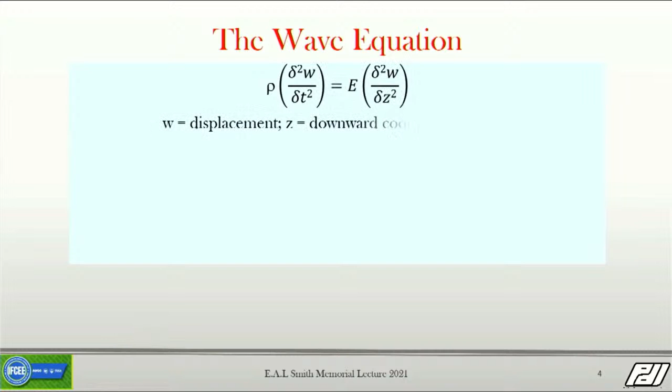One of the things we have to do when we talk about wave equation, even though the PDCA hates it, is we have to talk about the wave equation. I mean, that's what it is all about. There is this partial differential equation. It's a linear one, about the simplest one there is. And of course, for us, it has to be simple and straightforward.

It involves a particle of the pile, W, that moves down the pile at a certain speed. Practically what it expresses is Newton's second law, namely that rho times the second derivative with respect to time, which is acceleration, mass times acceleration, equals force. That's all it is. This elastic modulus is important, together with the mass density. If you take their ratio, you get the wave speed, and that makes it easy to solve that equation.

And that gives us this solution of superposition of waves. With the wave equation according to Smith, it comes out that you have a downward traveling wave and an upward traveling wave of the displacements, the velocities, the accelerations, the forces, and the stresses. They are all in two parts, upward and downward traveling waves.

So you might wonder why I came to this conclusion that Einstein had come to. Let's look at the various quantities here that go in the wave equation: the elastic modulus, the mass density, the wave speed, the area A, the length of pile L. And then if you figure the volume of the pile, that's A times L, multiply it with rho, the mass density, you get the mass of the pile. That's what the contractor usually gets paid for. That means the mass of the pile is equal to ALE over C squared.

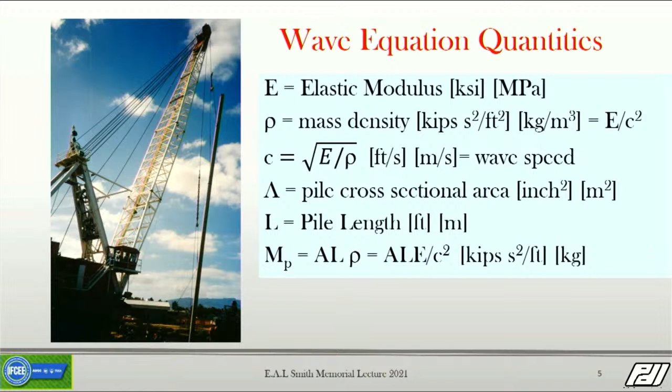So now it dawns on you what Einstein had invented. E.A.L is nothing but energy. That's why the Smith family, mother and father, gave their name E.A.L to son Smith, Edward. So no wonder that Edward, as a mechanical engineer, later in his life made a model using E, A, and L for the spring and for a mass in which he divided the pile.

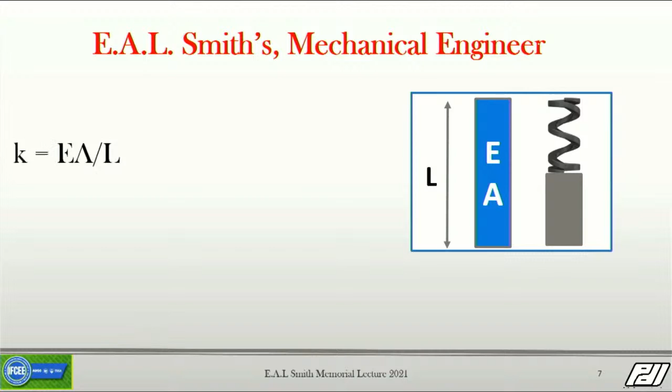So the stiffness, of course, is E.A. over L. That's the spring. And the mass is E.A.L divided by C squared. That's the whole thing. That's our wave equation.

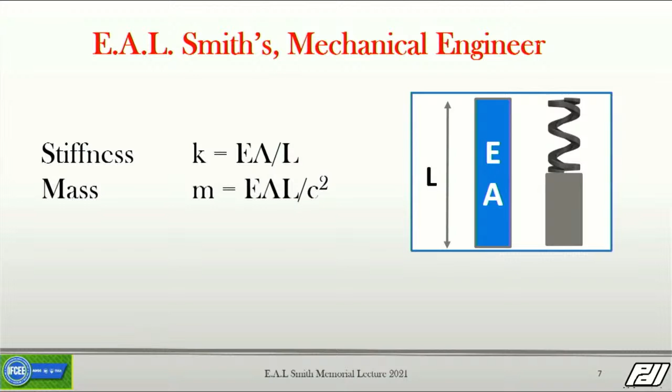And now you know why we need those three letters in his name. There was a big discussion in the committee, I understand, should we really use all three letters? Yes, they are most important.

E.A.L here, that's the final model he came up with, where he realized we have to use a bunch more segments, maybe a meter long or so. And they are all, these segments, masses and springs. And that you can even use for the cushions and the hammer and the helmet. And then we need, of course, something about the soil, unfortunately.

And there, being a mechanical engineer, he thought, oh, well, we need again a spring, and we need a dashpot, like in a car, a kind of damper to represent the dynamic effect of the driven pile.

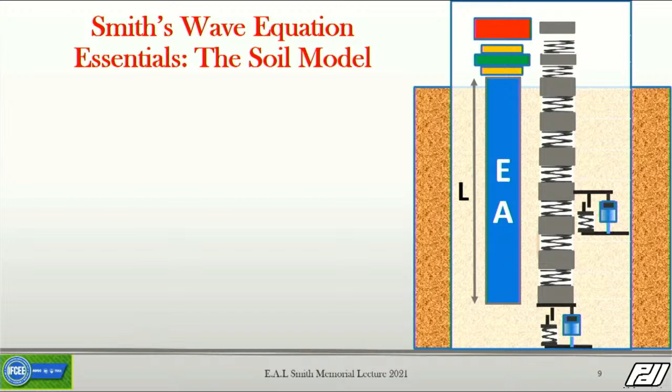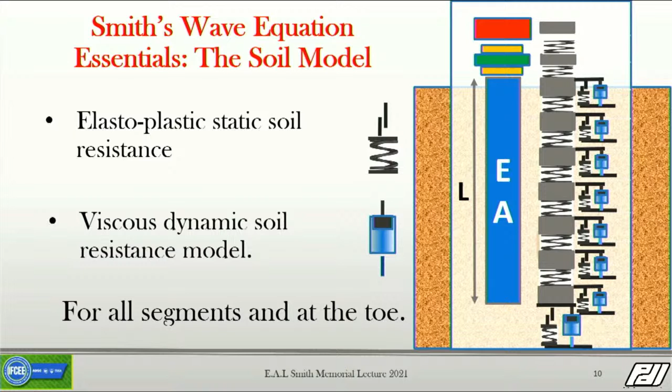Well, then the geotechnical engineers came about and said, sure, that elastoplastic soil resistance is nice, and the viscous dashpot, but we do need it to represent the resistance distribution on all of the segments and at the pile toe. So we got our shaft resistance and our end bearing.

And Smith was not only doing a mechanical model of the pile, he was able to give us some values to calculate with. The one value that we needed was the so-called quake. And a quake is related to what the pile driver observes when he's in the field.

The quake is practically the rebound of the pile. You push the pile down with a hammer, and then it rebounds a bit, and they call it quake. And indeed, we see that spring contracts and then expands, elastically with an amount quake, which is Q.

Then the capacity cannot exceed the value RU, that we have from geotechnical formulas. So that is how it looks then for both shaft on the left and toe on the right.

You have there the elastoplastic increase of the resistance as the displacement of the pile segment goes down. And Smith gave us values of 0.1 inch for the shaft and for the toe.

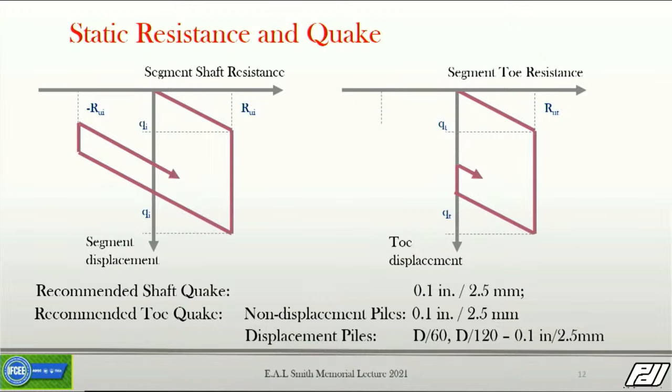And Smith piles were all relatively small. They were the largest diameters were probably 14 or 16 inches usually, and the 0.1 inch is pretty good for that. Now that we went to larger piles, like a 36-inch concrete driven pile, we have to use the diameter as a criterion for that quake value.

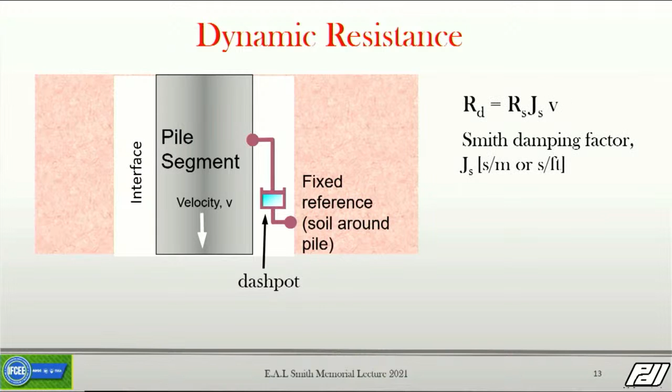And also for the dashpot, he gave us the so-called Smith damping factor, which is 0.05 for the shaft, seconds per foot. And it's a little bit of an awkward model that he uses. One has to multiply the damping factor, which is in seconds per foot, with a resistance to come up with the actual damping factor.

So it's not truly linear, but for those purists who want it truly linear, we also provide now the model with an RU instead of an RS, and so then it's a truly viscous damping. But no matter what we do, we always go back to Smith's model. It is really the one that works most reliably under all kinds of circumstances. Not very sophisticated, but reliable.

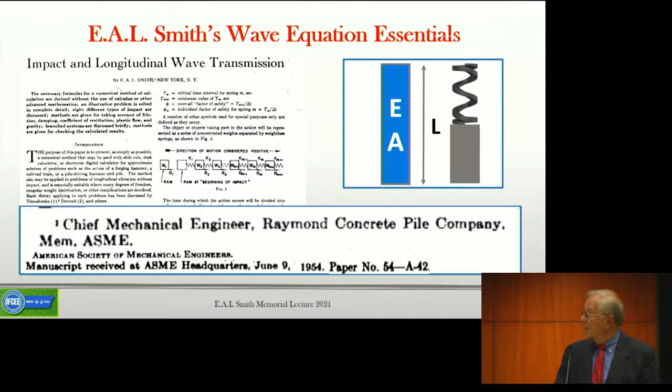And of course, there are possibilities of having some errors still. Anyhow, he wrote about it in a 1954 paper, and then later, or actually earlier, he wrote a paper after a seminar at IBM, and the seminar was in 1950. And in the seminar, they discussed how this wave equation was to be programmed.

And I have heard through George Goble that this was actually the first engineering non-military program that has been written for an electronic computer. So he was way ahead of everybody else there in the civil engineering community. And he later then, of course, published that also in Geotechnical Engineering Journal. And that 1960 paper is the one that's frequently quoted today still.

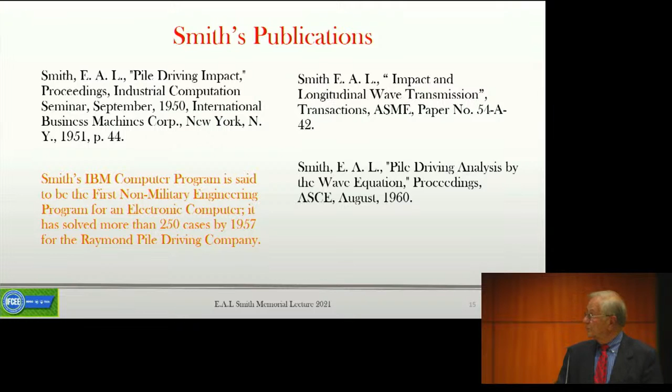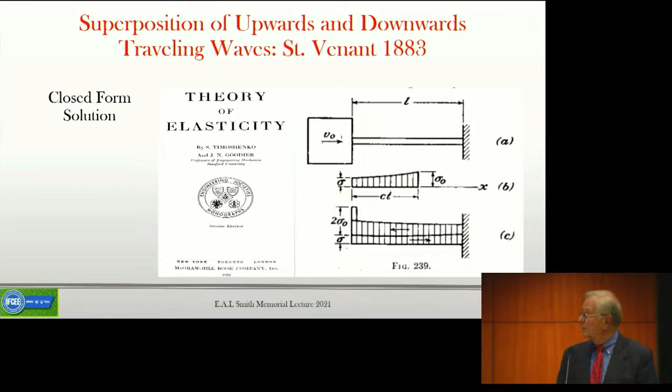Well, in the earlier times, the solutions had been done with the superimposition of waves, like Saint-Venant solving here the pile stresses under a rigid mass. And that was then written up in theory of elasticity by Timoshenko, and it was really my Bible when I worked on the interpretation of data.

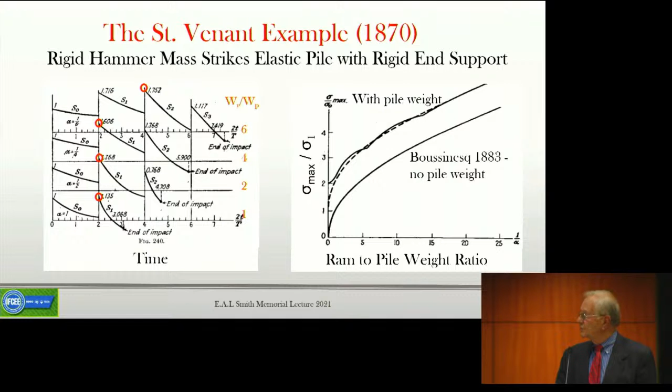Boussinesq, for example, used it also earlier in 1883 to come up with something that related the mass of RAM to pile weight ratio, and that formula was later still used frequently as a rule of thumb for how big your RAM has to be when you're driving a pile. But that was not considering yet the tension stresses that could develop in concrete pile.

It couldn't be done by many people. And so, one thing that came out of it, though, that's useful for us is this graph of time and length, which is very instructive on how the waves travel down the pile and return.

And we used that then, and I used it in my thesis in 1970 to interpret the data, like on the right-hand side, you see the force and velocity data that we collected, and then out of that came the upward wave and the downward wave.

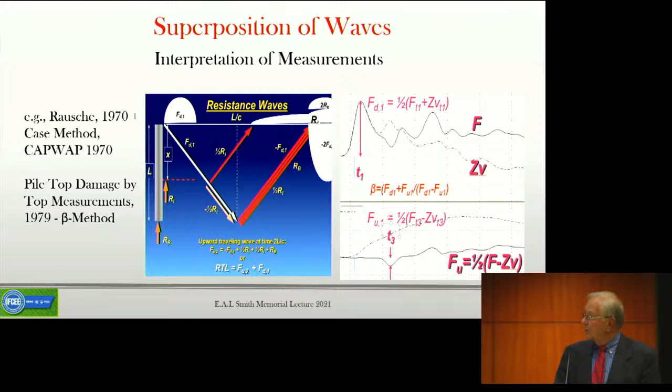And that leads then to the development of the case method, and then also later for the signal matching with this method of characteristics, as it is being called, where instead of EA/L, you are now using EA/C, the impedance of the pile. And so you use pieces of EA/C, and other people, particularly in Europe, are using that solution for their wave equation analysis. But we use it for both the case method and the CAPWAP method now, after initially using also for CAPWAP the Smith solution. And so you see on the right-hand side, in the upper right-hand corner, for example, a matched wave-up curve.

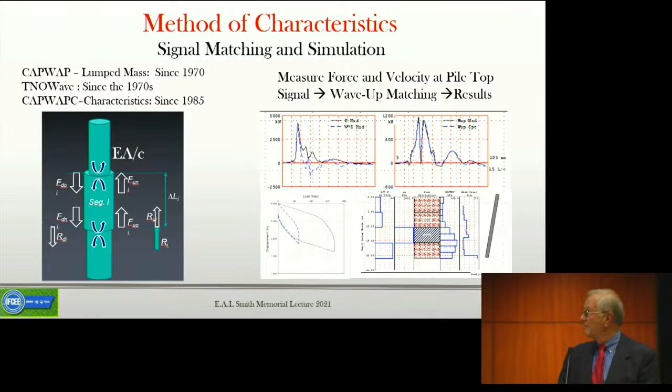Being in Texas, I should mention all of the work that has gotten into the Smith solution at Texas A&M by Samson, Hirsch, Lowery, and others that did a thorough work on checking the method and the parameters that go into it, and that really helped to get the attention, let's say, of the highway departments, the Texas Transportation Institute, and the Federal Highway Administration on the power of this solution. And they did also plenty of capacity correlations.

Coyle and Gibson did some interesting work on trying to get the damping factors by impact loading triaxial models, and then getting the ratio of the dynamic to static resistance versus velocity of loading. And so that then was picked up by quite a few different researchers who thought, now we have a better damping model. But after all the efforts and the years that went into it, we all went back to this old Smith model because it's just so much more practical and easier to use.

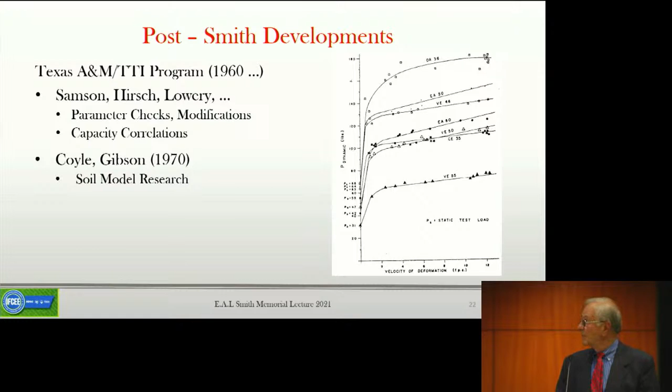One thing that Smith had not done, and that hadn't been done yet at the Texas A&M program, was doing something for the diesel hammer, which is quite a different animal. And so in a dissertation that came out in 1975, Dave Rempe, who worked as a graduate student for Tom Davisson at the time, came up with his Diesel 1 program.

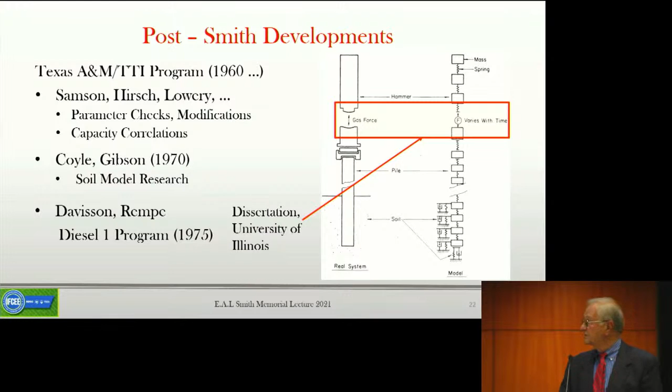And so then in 1974, the Federal Highway Administration did kind of a competition between TTI and GRL, at that time Goble Associates still. And they said, well, write us a program now that includes the diesel hammer and also compare it with field measured records. And in that regard, we were kind of ahead. We had a lot of records already taken under impact hammers on pile tops, and they consisted of force and velocity, and we were able to machine process them.

So both institutions were actually awarded this contract, and both programs were developed. We called ours WEAP. And so in 1976 already, we were able to present a program along with the necessary documentation, and we gave seminars already. I should mention the help that we got from the FHWA and also the New York DOT. For example, Paul Bailey was a great help in checking the program.

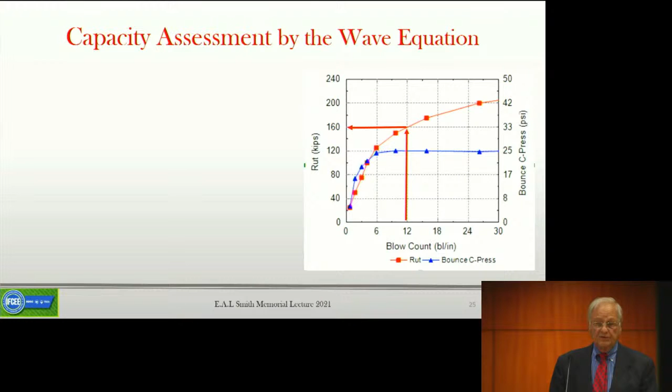Well, let me give you a few little stories here. First of all, about the capacity assessment. That's, of course, one of the things that wave equation was supposed to do. It's supposed to give us a better formula, and it does. The formula, the dynamic formula or energy formula, as it was called, is very simplified.

But if you create with the wave equation analysis a bearing graph which relates the capacity to the blow count, then you can go in with your known blow count from pile driving and read the capacity of the pile. Now you will have to apply a certain factor of safety to it, which has been 2.75. Right now we would use an AASHTO resistance factor of 0.5 and then use that capacity with 0.5, and it has to be greater than the factored loads in the new LRFD method of the AASHTO specifications.

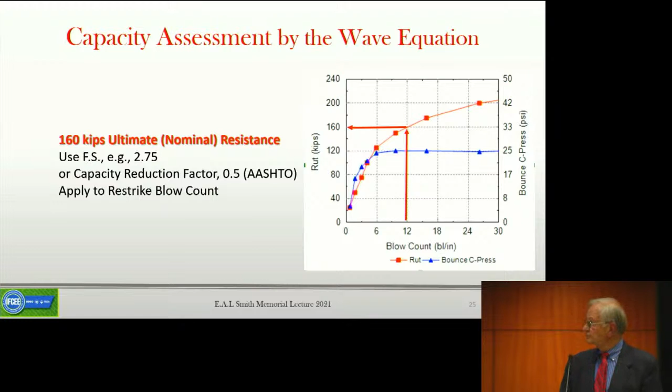Well, in 1972, we then had this memorable demonstration.

Purdue University had organized a specialty conference on foundations, and George Goble suggested we do a demonstration at that time in Lafayette, Indiana. People were invited to a field demonstration of pile driving, an H-pile that had been given by ASCE as a gift.

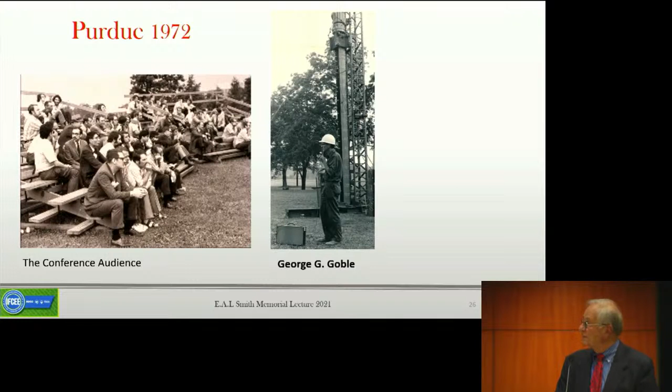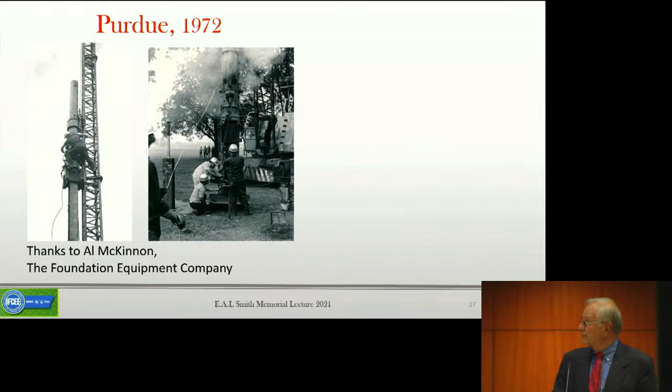George Goble then organized the rest - for example, he had sacrificed some Purdue graduate students to do this, what we call a load-set diagram on the pile while pile driving is going on. So they pass a pencil along a piece of paper while the pile moves.

And then we connected our instruments along the pile.

And then came Professor Leonards and said, well, hey, can't you get the residual stresses too? And we thought, oh my God, now residual stresses, this is tough to measure - you need very precise measurements. Well, we hoped we could do that. So we worried about that.

Anyhow, the demonstration started with all our wires connected and our first pile driving analyzer connected to that thing.

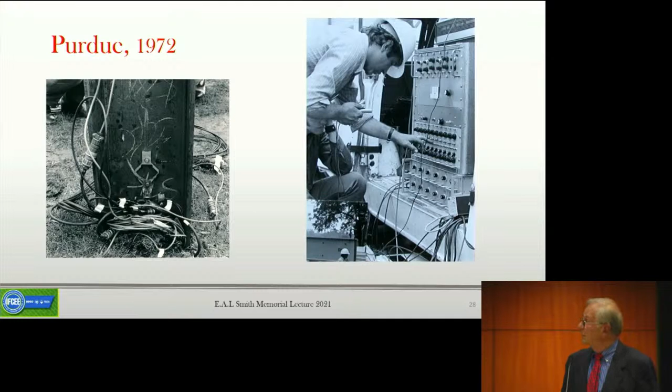George Goble was reading that thing, and of course a downpour started - reminded me of the Dallas downpour yesterday. We had everything set up outside, and we had to push the tape recorder under the car and out of the rain, and had a little bit of noise in the lines because there was water getting in there.

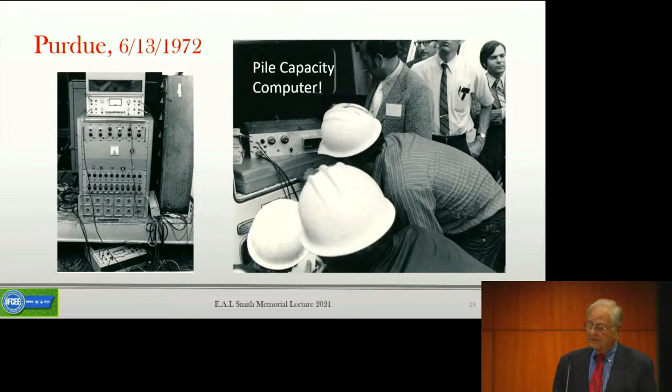And so he came up and looked at this little output from the pile driving analyzer, which was still called pile capacity computer, and read a number - once 145, a little bit later 175, and that was in kips. So the pile driving was done, and the rain was over right at that time.

And then a static load test was set up for the next day. Here I might mention Hal Hunt, some of you may still know, one of the organizers of DFI, who had interviewed me at the time. He wrote a newsletter for DFI, and was before that at Engineering News.

All right, so then we did this load test also. Everything has been written up by Goble, Kovacs, and Rausche. William Kovacs was a graduate student - no, he was assistant professor at the time at Purdue. Later he had quite a few battles with George Goble when he was at the Bureau of Reclamation about how to properly measure the energy in an SPT rod. So they were working together later for a long time. He was going pretty high up, I believe, in the Bureau of Reclamation later.

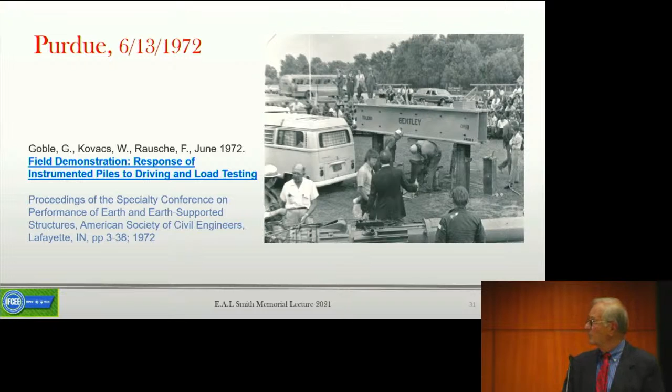And then Dave Rempe looked in his chart that he made, his bearing graph with his Diesel 1 program. For the 40 blows per foot at the end of driving, he came up in his chart at 166 kips. Had he used the old Smith program, it would have been 180 or something, or 175 or so.

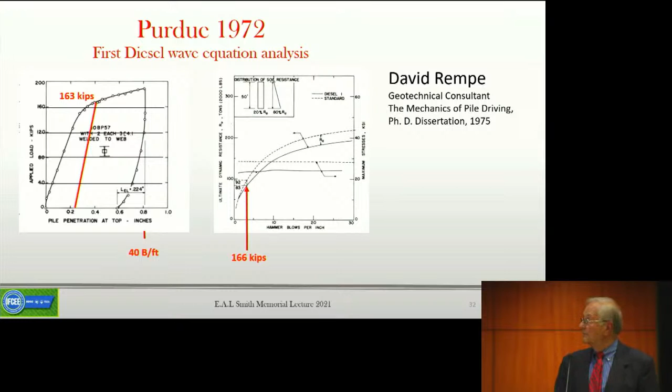Anyhow, the load test then, the day later, showed 163 kips, so that was quite successful and amazing. Now, of course, this capacity is the Davisson capacity, and we know that capacity is something undefined - there are various definitions for it, so it's also a little bit of luck, of course.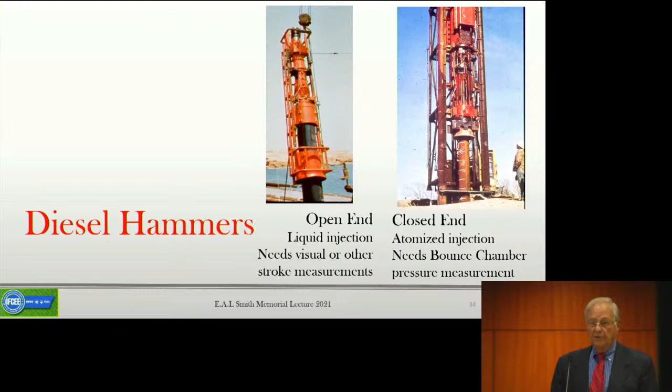Well, diesel hammers have become more and more important, and those are animals - not just machines. They do what they want. You put some diesel in, and they might jump this high or that high. For the closed-end hammers on the right-hand side, you have to have a so-called bounce chamber pressure gauge on them to know what the jump height is inside of this hidden thing. On the open-end diesel hammer on the left side, you have to kind of see - is the ram coming out? And it's good. If it's not coming out, then you don't have much resistance, probably. Well, you have to study that accurately.

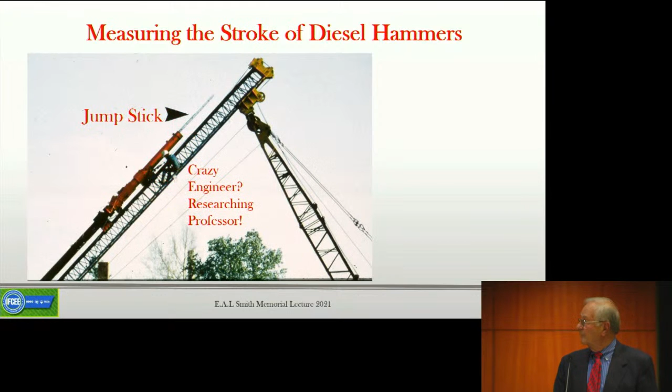And there is Professor Goble sitting up on the 45-degree one-to-one leads. Thanks to McKinnon, he got a little stick mounted to the lead so he could comfortably sit right next to that hammer while it was exploding and see on the jump stick up there how much the stroke was, so that he could talk into his tape recorder.

That crazy engineering feat produced data that we could use later in the so-called saximeter formula, which we now use in that little instrument that times between hammer blows and converts that to stroke for open-end diesel hammers. It also helped us in our check of the wave equation analysis.

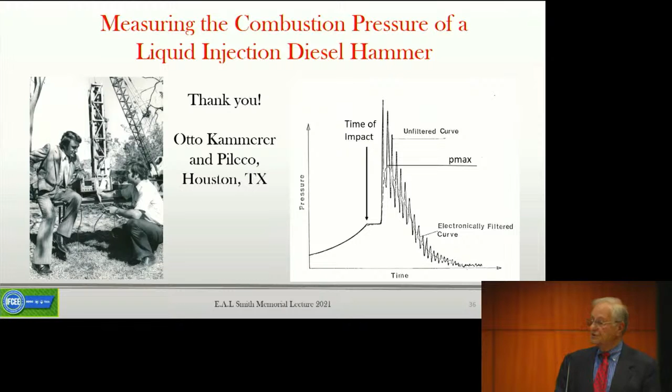Another gentleman who supported us a lot was Otto Kammerer of Pileco, here in Texas. He did a lot of tests for us on his test grounds, and he didn't care much about the neighbors around him, even though this test area was within a zone where people tried to live peacefully. We measured pressure there on these hammers, and we did that on a few other occasions on other hammers, which was very helpful.

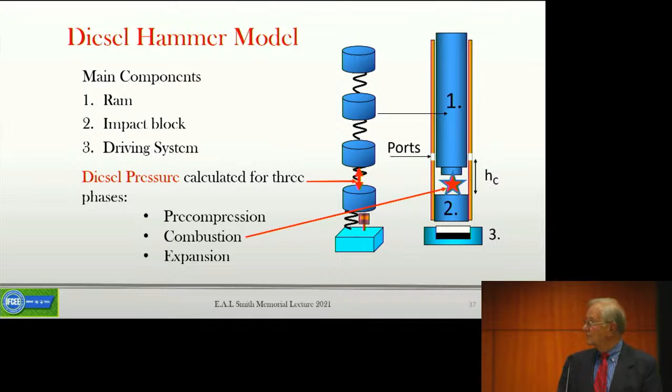That was helpful in our development of the diesel hammer model, which consists practically of a Smith E.A.L. model of the ram and the so-called anvil or impact block inside, plus the driving system underneath. The pressure that develops in the hammer is then modeled with three different phases: precompression, combustion, and expansion.

We need these measurements to help us come up with the pressures that we have computed, and then a potential correlation with actual measurements on the pile top, like you see on top, the forces that we had measured on a diesel hammer.

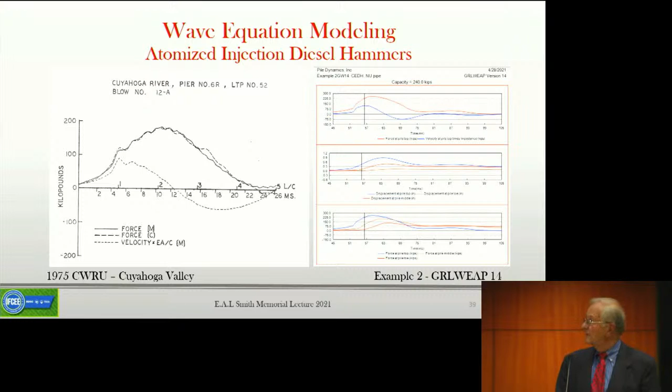As you can see for a closed-end hammer here, we also had a pretty good agreement. On the right-hand side, the plots from our newest GRLWEAP program show quite nicely the forces as they were on this 1975 job in Cleveland, recorded on the Link Belt 520 hammer.

Capacity is not everything. One of the important things E.A.L. Smith had to do for Raymond was determine the stresses in the mandrels, because apparently the mandrels used to break, particularly at points that were pinned together. These things were typically 8 feet long and were very heavy pipes, and these pipes had to be held together with a pin, and there was some slack.

Already at that time, Smith modeled and coined this term 'slack in the pile.' So it's really a pile that allows for some tension between segments.

Now I'd like to show you a little timber pile example where we had some soil boring, probably SPT, and a Vulcan #1 hammer, in Louisiana. It was pretty recent, actually—for me, recent—about 5 years ago.

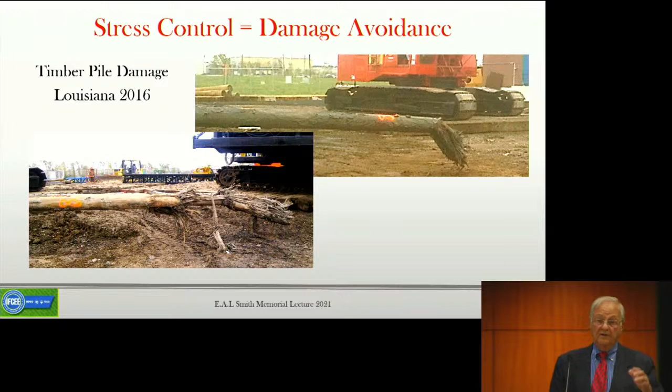On the construction side, we had a bit of a stress problem. These piles were 60 feet long and only had a 7-inch diameter tip, and they went into dense sand. The driving criterion was that you had to get the pile down, but it shouldn't take more than 30 blows per foot. So I checked it with a wave equation analysis.

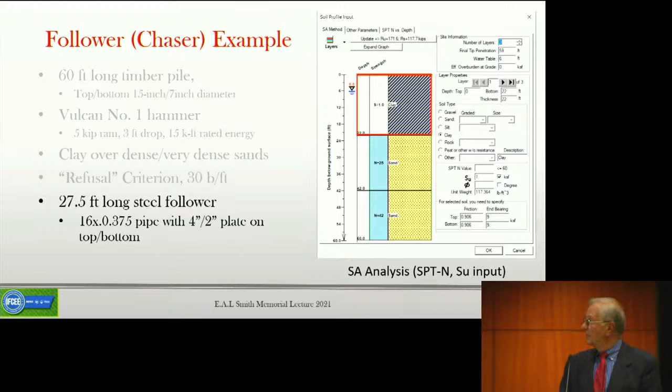This was an interesting project, not only because the pile was subjected to high stresses as a non-uniform pile, but also because they put a follower on top later, since it had to wind up about 10 feet or so below ground, and then a pump station was built on top of it later. So this is the follower on the right-hand side—a steel follower on a timber pile—so it becomes a pretty involved model that we had to use.

It's always a question what the follower does to the pile, whether we get energy losses, and what the stresses are in the pile underneath. We are able to analyze that pretty rationally with slack again between pile and soil, and pile and follower. And of course, the follower also goes into the soil a piece that we have to consider.

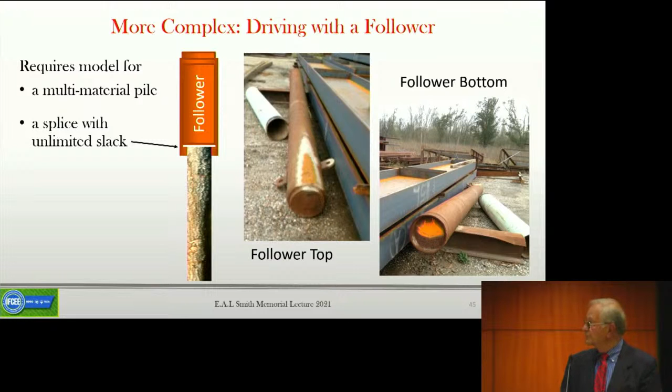We use the model of Smith, and I must say this is something where the Smith E.A.L. model is really superior to other models like the characteristic solution, because it allows us to make a really realistic assessment of a somewhat nonlinear event.

The results here—I don't know if you can see these numbers well—but they show, in that red box, the forces and stresses. The compression stresses, in the second column from the right, go from 15 to 16 KSI in the steel down to 1.6 KSI in the wood. But on the other hand, the energy decreases gradually—there is not much energy loss in that slack.

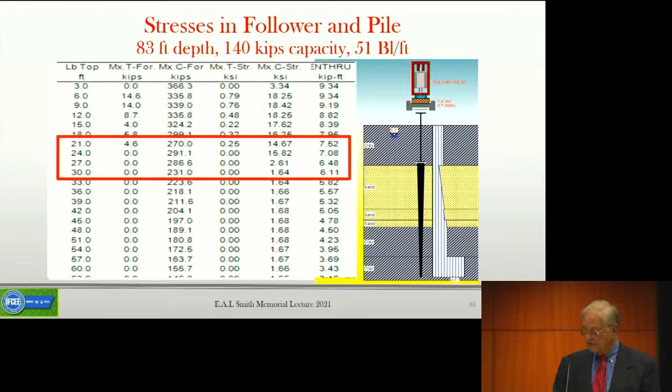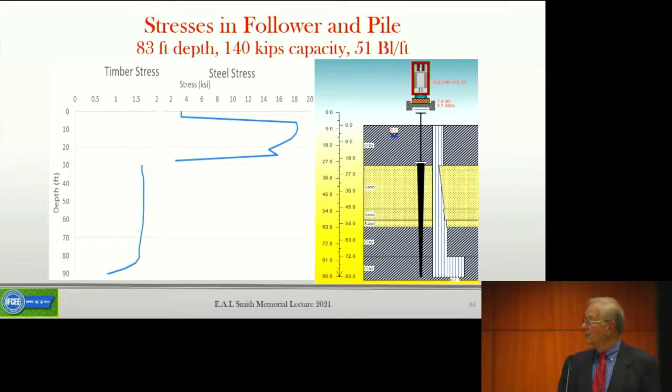So you can see there quite a bit. This plot here shows you the stresses in steel on the right top, and timber on the left.

Well, residual stresses is something that has become more and more important. As I mentioned, Professor Leonards already pointed that out in 1972, that we should do something about that. For long, slender piles, it's important.

So, well, Holloway already in 1978 had done a thesis using the Smith TTI program, introducing the residual stress analysis.

Residual stresses develop in a pile because when you drive the pile down, you push it down under a hammer blow. It tends to rebound a bit, but the negative resistance forces along the shaft that develop then hold that pile down, keep it in compression, so when the next blow comes, the pile is already compressed and doesn't have to be compressed any further, and then moves relatively easier into the ground. So that makes actually the pile driving a bit easier, and makes the pile stresses a little bit higher.

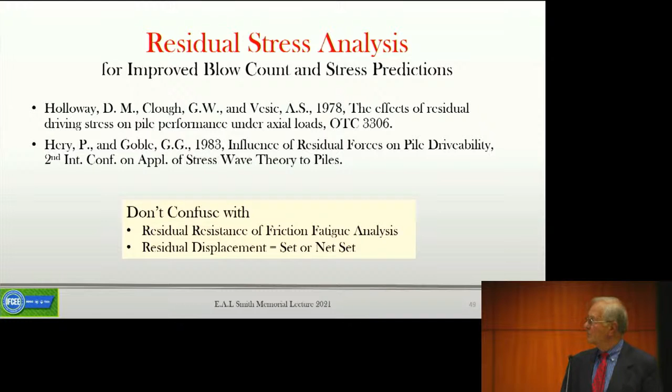Well, in any event, for the Becker rod, for example, for the Becker penetration test, residual stresses are actually something important. The Becker test is designed for very dense soils where the SPT rod cannot penetrate. And so the Becker test is used primarily to evaluate the soils of dams for liquefaction.

It is a 6.63 inch diameter, heavy walled pipe, closed-ended, driven with a closed-end diesel hammer, an ICE 180, which drives about 90 blows per minute, and is so a very convenient system to obtain a blow count, which is called N30, because it's normalized to 30% of the rated energy of that hammer. Like the N60 for the SPT was normalized to 60% of the SPT hammer.

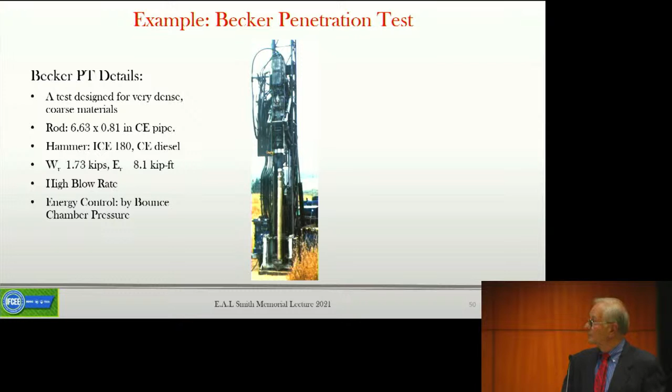So they drive this thing down, and lately more and more measurements are made, now also at the tip. And because it's really important for evaluating the blow count and the liquefaction potential from the blow count, how much force or energy gets to the pile toe.

So with these measurements now being done on top and toe, you have to be sure you interpret them correctly. And here is the resistance distribution from our wave equation analysis again, showing also the end bearing, something more than 40 kips here actually, as evaluated first with a red line by the measurements and with a black line by the RSA analysis. And that's something that, of course, Bengt Fellenius had been warning us against, not to misinterpret our measured data because of the residual stress effect.

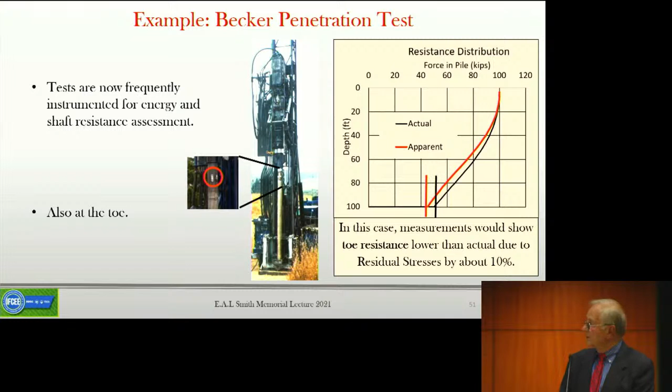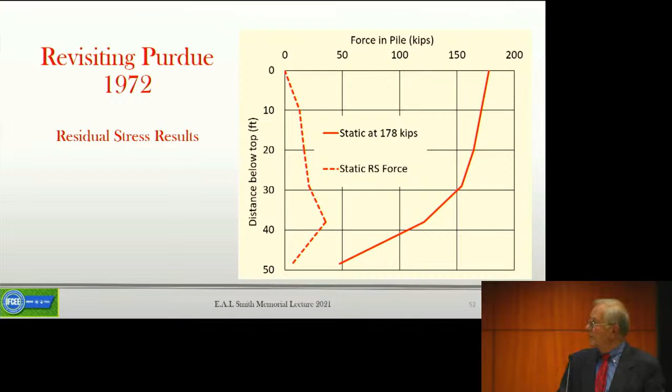CAPWAP shows something similar. One of the differences at the very toe of an H pile is that we're not too sure over which distance the plug actually has its effect getting into the steel itself, and we measure force at the steel. So there's always a little bit of uncertainty how much force we really have at the very toe of that little bitty steel edge.

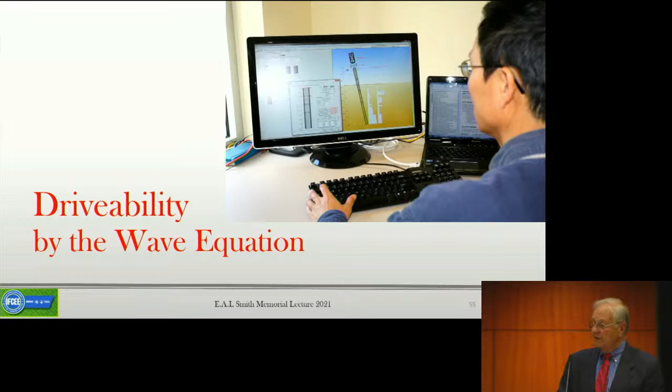Okay, I have to mention the drivability analysis, and here's Dr. Lee Quinn, who tirelessly is programming our program to expand on the drivability analysis, which means that in addition to the bearing graph and the so-called inspector's chart, we now have a third analysis type in the program, which is the drivability, and it has become very popular. Everybody around the world wants to do a drivability analysis.

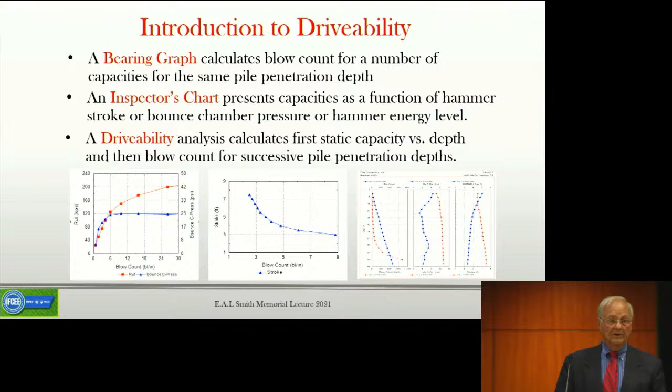They're not so much interested in the bearing graph anymore. They want to know how many blows will it take to get the pile in, how long does it take to get the pile into the ground. So what it takes is that we do an accurate static analysis of the soil. In a way, we're kind of doing the opposite of what was done at Smith's time, where he said we don't know what the soil does, and static analyses are unreliable. So now we're saying we can use those static analyses to get us a long-term resistance, and from that we estimate a so-called static resistance to driving, the SRD.

So we reduce that long-term resistance from the formula, and then we get a resistance that we can subject our Smith wave equation to and get our blow count. Now the SRD is calculated typically with a setup factor, which pile drivers know. When they do a restrike, they have more resistance than at driving. The ratio is the setup factor in very global terms.

So we need something that tells us what the soil is doing. We can use the much maligned SPT test that everybody says is not very accurate. We can use what everybody praises, the CPT. We can, of course, in Texas, use the Texas penetrometer, the heavy one. And then we can use grain size analyses, friction angle, and undrained shear strength, and then, of course, the soil weight gamma. And we need the water table also and the soil type to be able to do something.

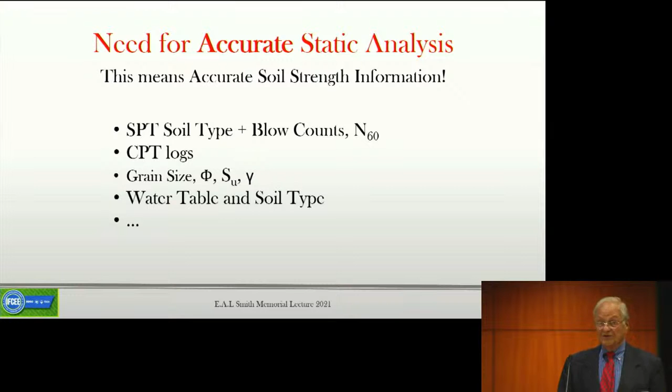Here comes the SPT, always helps us with the soil type. For the CPT, we have to kind of guesstimate what the soil type is. So we can do that again with our Purdue example. We had an SPT. We can divide the soil into these layers that you see on the right-hand side from the SPT. And then we see that our static analysis, our SA analysis, gives us 177 kips. So not bad - we had 166, 163, 177. That's all pretty close, and that is a long-term capacity.

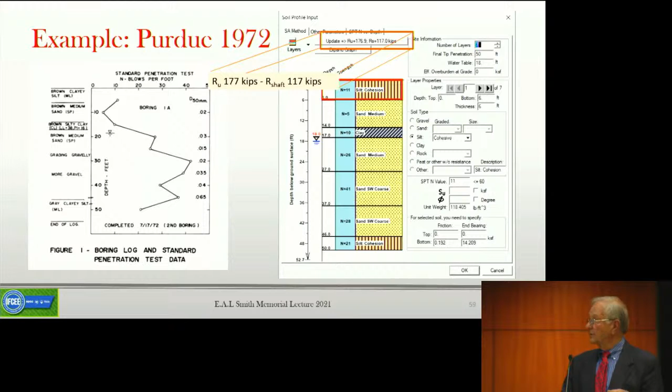Actually, in the sand, it's not very substantial - there is some loss of resistance during driving. We use 83% typically during driving. So then we can do our calculation of unit shaft resistance, unit end bearing, quakes, and damping, all versus depth, like in this table, and come up with, on the left-hand side, capacity versus depth and blow count versus depth. And if we look at this together now - blow count and driving log, the driving log is in blue, the blow count from our wave equation in red - you see they agree quite well, so not too bad.

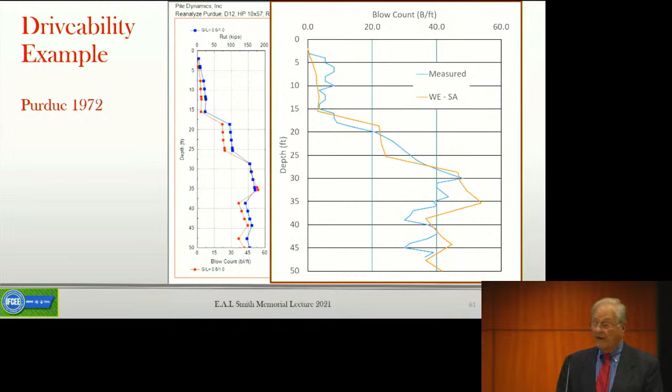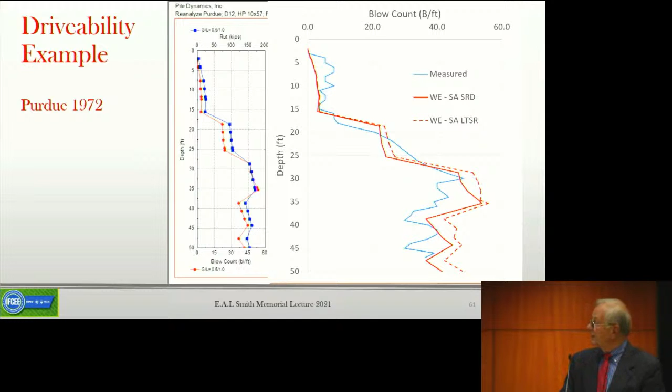And that with a stupid SPT test. But of course, these were relatively simple circumstances. Had we used the full resistance, the long-term resistance, you would get the dotted line - you would get a little bit higher blow counts towards the end.

Now, there are plenty of error sources, and I don't want to go into them all. Of course, one is hammer performance, all of these quake and damping factors, and the resistance versus steps in the SRD calculation method.

If we look at all those methods that we have now in the program that use SPT or lab constants, and plot the long-term resistance - those are the solid lines on the left-hand side - then you see that they can give us quite different results for capacity versus depth. The black line is what FHWA used in their driven program, and it's really using the Nordlund and the Tomlinson method. The lowest value was the SA method that we usually use, our SPT-based SA method. And in between, not too far above that, we have the API methods from the American Petroleum Institute.

The newer one and the older one are almost the same for non-CPT - why do I say CPT? CPT methods, cone penetration test methods, non-CPT. So they are relatively close together with the Bowles method, which is the one where we only give it like medium sand or stiff clay.

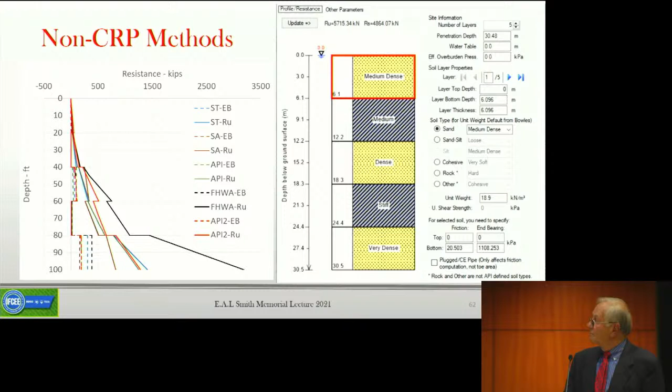Another method came up, particularly fashionable in Europe now, called the friction fatigue method. It had actually been introduced already in 1977 by Heerema for offshore work. It says that you can wear down a soil, reduce the soil by fatigue. So those elements subjected to a lot of pile driving fatigue more than those down below that just experienced a few hammer blows.

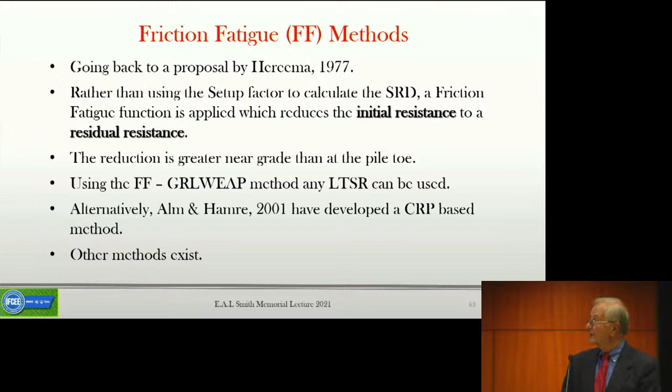So between those highly reduced elements and those further down, we have kind of an exponential decay of loss of resistance. That's in very short terms what they proposed, and Alm & Hamre in 2001 put that in a very concise form with all the necessary equations, so many people want to use that now. So we had to use it also.

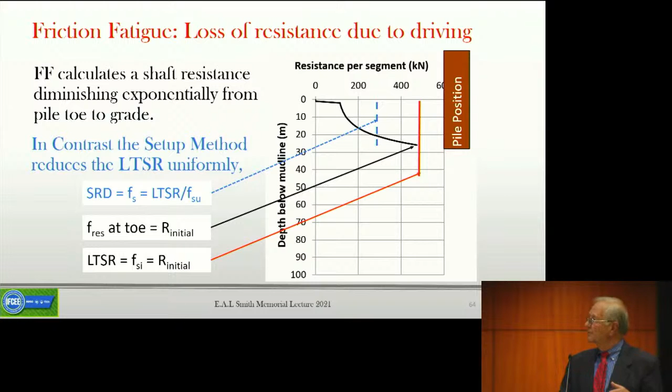Here's a demonstration of this exponential decay of the resistance in a friction fatigue analysis. There's a blue line in there, a dotted vertical line, showing the SRD calculation from our setup factor, which is done uniformly over a soil layer. In contrast, the friction fatigue method does this exponential decay.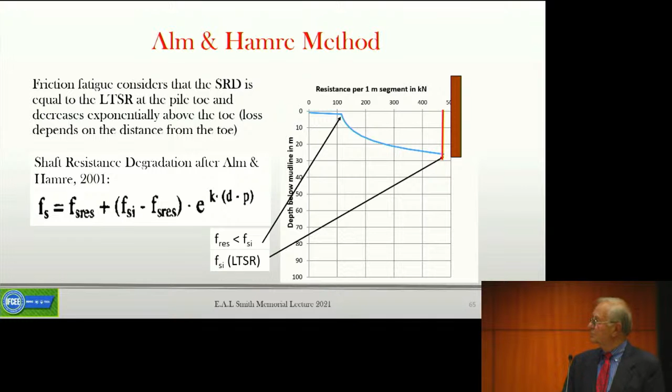Alm & Hamre gave these equations for that E function, and they also gave very specific formulas based on the CPT test that are practically a beta method for sands. And there is, of course, our cone resistance QT in that equation.

What is interesting is if they use a very high resistance at the shaft, the initial resistance as they call it, based on the cone penetration test, then they use a reduction factor of 5 for the sand. We use only 1.2 for our standard setup method. So they use a very high initial resistance, but then reduce it very sharply by a factor of 5, near the grade, some distance above the pile toe.

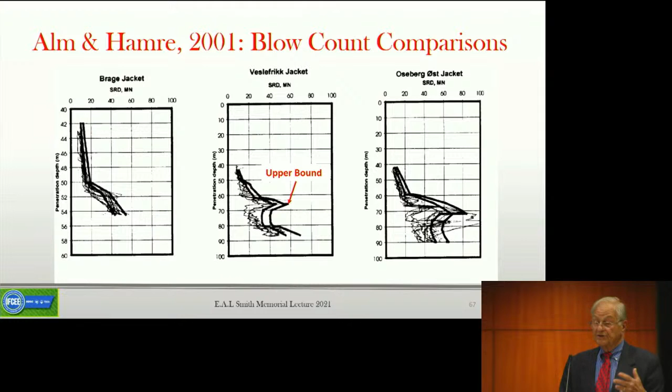They did a lot of correlations, and they also suggested using an upper bound to be safe, 25% higher than the normal analysis.

If we do that for our Purdue example again, we come up with this black line now, which is a little bit lower towards the end of driving, and that's what friction fatigue is all about.

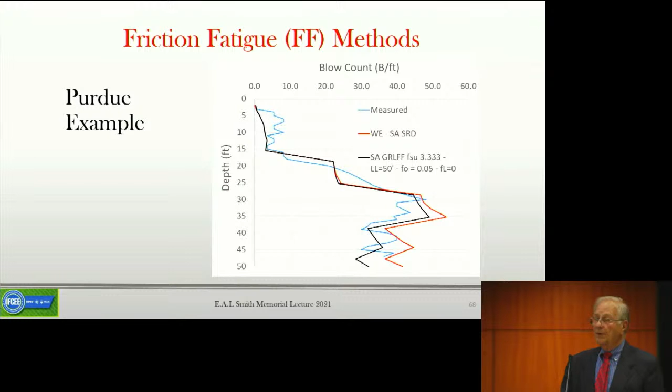When you drive the pile deeper and deeper, you may not gain all that blow count anymore. We've observed that frequently in the Northwest, for example, that you drive a pile and it doesn't change the blow count - it keeps a constant blow count throughout driving. So that might be one way of improving the prediction of very long piles into very dense sands, as it seems.

Okay, let me quickly show now also - I've shown you the non-CPT methods, I want to show you a few CPT methods. I digitized myself by hand with a red line this electronically recorded QT and FS, cone penetration resistance and friction sleeve resistance. I wanted to compare what comes up as a result of that.

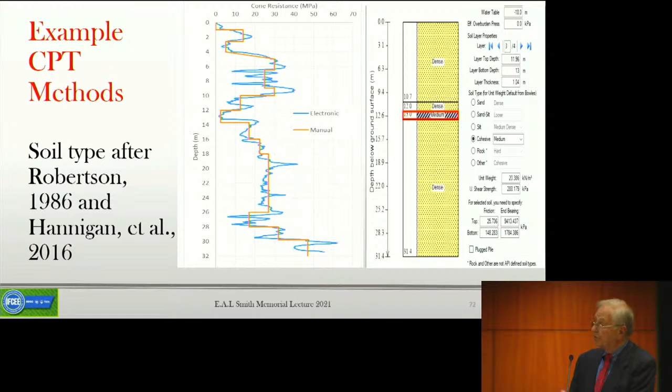That jumped again, but it doesn't go back. Then we have to assign a soil type, which we do via Robertson - that was that previous slide. It jumps around according to this chart, and then we get the soil types that way automatically, or you can do it by hand. So then I did the Schmertmann analysis, and you see that my hand digitizing and the electronic one are pretty much the same.

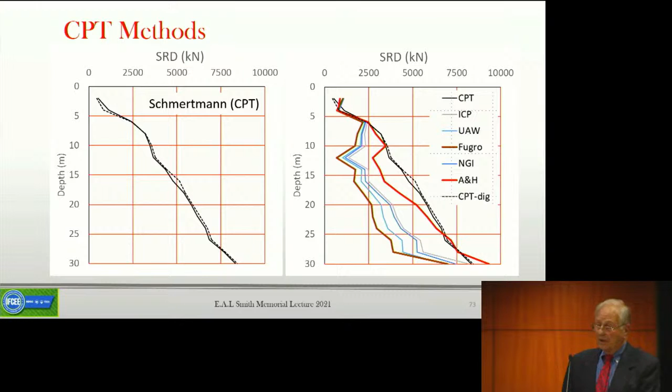That's the Schmertmann CPT method, giving you this resistance during driving. Then if we compare that with all the other methods that we have available now - the red one being the Alm & Hamre analysis, this is friction fatigue analysis - and then the other methods are primarily the 4 CPT methods that the American Petroleum Institute is recommending, you see there's quite a bit of difference between these results.

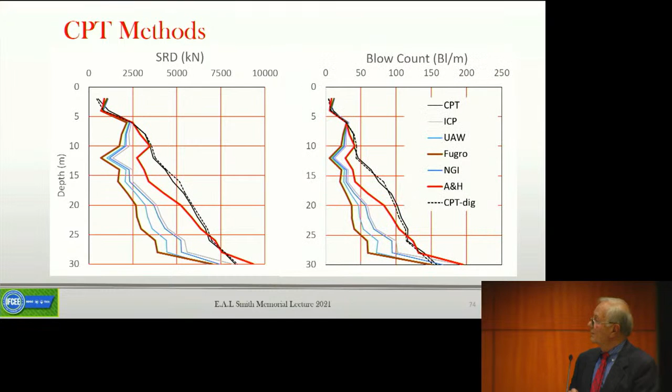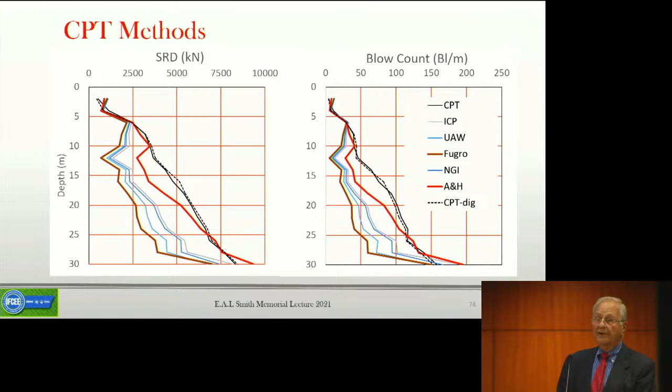And if we calculate the blow count from these, you see the blow counts on the right-hand side can easily differ by 150%. So it's most important, when selecting these methods, that you know what's going on locally. You may come up with your own preferred method that works best for you, because if you go into a new area, you might stray away from the real result quite a bit with this analysis.

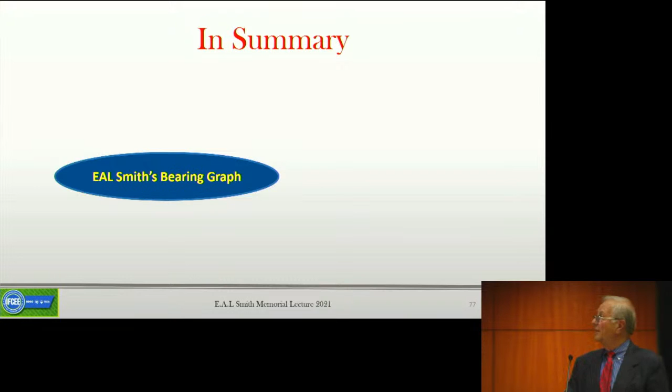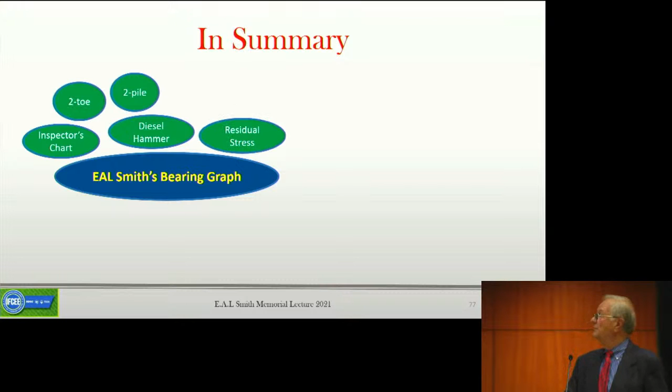So we have our Smith E.A.L analysis, and then we put in a diesel hammer, an inspector's chart, a two-pile analysis and a two-toe analysis, a residual stress analysis, a drivability analysis, and we added variable cushion analysis, variable stroke and energies, variable efficiencies during driving, variable pile length, along with the possibility of setup during driving or an interruption of driving. And then we need the static analysis in our program.

This is our SPT analysis, the soil type analysis, the CPT by Schmertmann, the API, the old one. Oh, in the meantime, let's do a vibratory analysis too - forgot about that. Then comes the FHWA with the inseparable Tomlinson and Nordlund methods of calculating resistance, and then API 2 with those four fearless fellows: Imperial College, Fugro, University of Western Australia, and the Norwegian Geotechnical Institute.

Well, you can get a few different things. Right now we of course had to add the friction fatigue analyses too, because it's all needed. And then we needed to count the number of stress cycles for fatigue analysis of the pile material, and we needed different hammers driving the pile - you can start with a little hammer and then come in with a big hammer on top of it. And then we have bottom drive even to do.

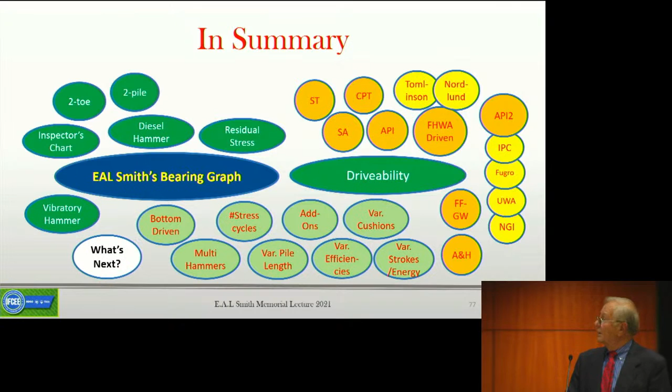I don't think so. Well, I think we have helped with the wave equation analysis, and Smith did so, with quite a few of the developments that have been going on in helping to check out what equipment would work in a certain area and what not. And then reversely, of course, the industry has driven us too, with these developments in the driving system area, as well as the developments of the computers.

And today's programming - what could be done in one night with a Fortran program in the old times when I did that - takes probably several weeks now from a highly specialized person, because it has become quite complex.

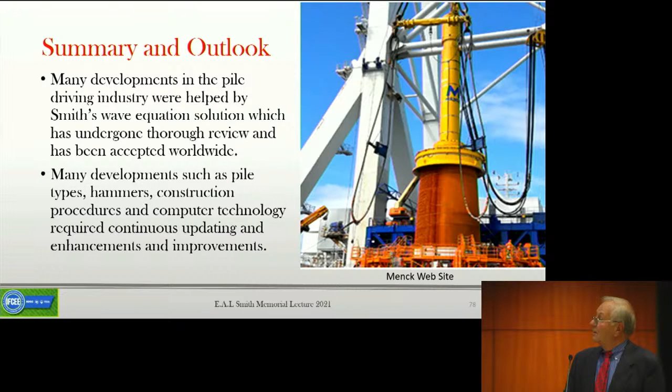One important thing, and there comes of course then the thanks to PDCA - like on the PDCA professor's course, education is most important, and educational events are most important. And we have all worked together. DFI has done a lot, and PDCA is doing a lot. And you know...

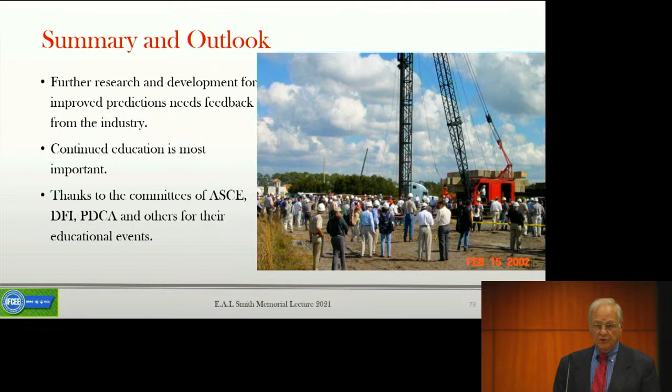ASCE too. But here it's another DFI event, and when we thought we don't do any more demonstrations because something will always go wrong if it can go wrong, that was one too here. It was actually a little pile that was driven in front of the audience, except it didn't go in the ground - it just stayed there. 150 blows per foot for the first foot or two. So everybody left after the initial event, and George Goble was sitting there counting blows very diligently.